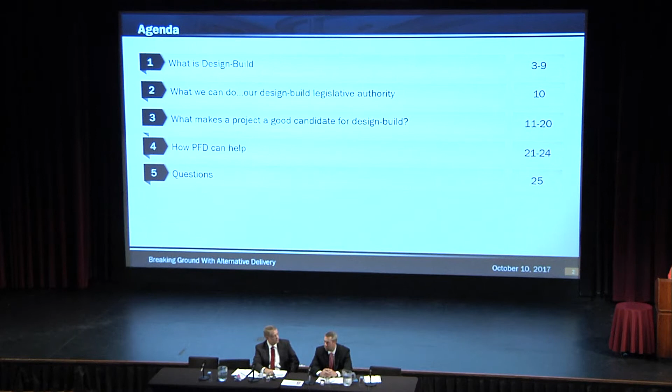Okay. Well, when the first polling slide comes up, I think there'll be instructions on how to enter your phone. You'll text a code to a number, and then at that point you'll get a response saying you're entered into the room. And when the questions come up, you'll enter the options on the screen. So I hope it works.

So getting started with what is design build. In its simplest form, design build is a contract where the design and the construction are both included in the project that's transferred over to the private developer. Contrast this to design bid build, where the owner or TxDOT will procure a full set of drawings. At that point, they take it out to the market for fixed-priced bids to build that scope. The risk for design errors or changes lies with the owner, and on design build, that's transferred over to the developer.

Additionally, it does have design included in the contract. It's still, though, primarily a construction contract. It can include some additional scopes, such as right-of-way acquisition, environmental permitting, utility relocations. Now, the level that this is included is a little bit up to the discretion of the district. If the district would like to purchase all the right-of-way prior to launching it, they certainly can do that. If they want to advance it up to a certain point and then during the procurement say, we're stopping here at 40%, the rest of the 60% will be up on you, developer, upon award of the contract. So there is some flexibility on how much is transferred over and how much is still done in-house.

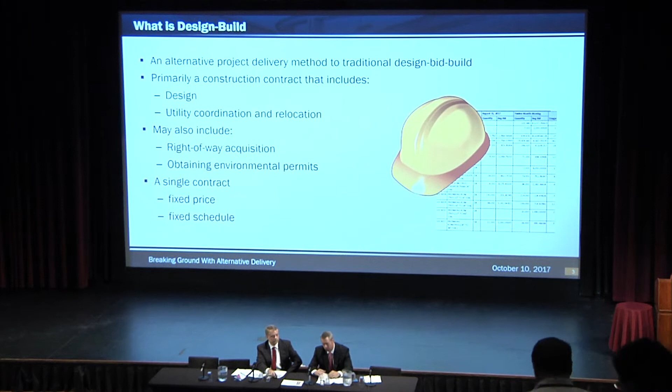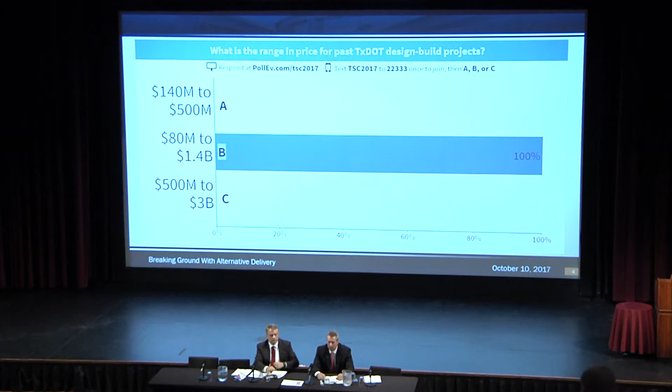So, on to the polling, right out of the gate. As you can see there, you'll need to text TSC 2017 to the number 22333. And then the question is, for those of you that may be familiar with the TxDOT Design Build program, what is the range in projects that TxDOT has done for past design build projects? Does it range from 140 to 500 million? 80 million to 1.4 billion, or 500 million to 3 billion? We'll give a few seconds for people to get their phones synced in. All right, I think we're good.

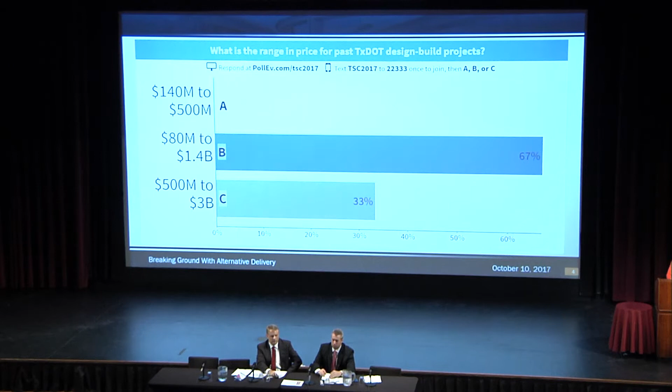And the answer is? So the audience thought it was B, for those that were able to get their votes turned in. And they're correct. The answer is B. The smallest design build project TxDOT has done is the US 77 down in Corpus, so it's 84 million. And the largest is the I-35E in North Dallas, which is almost totally finished. And that one's valued at 1.4 billion.

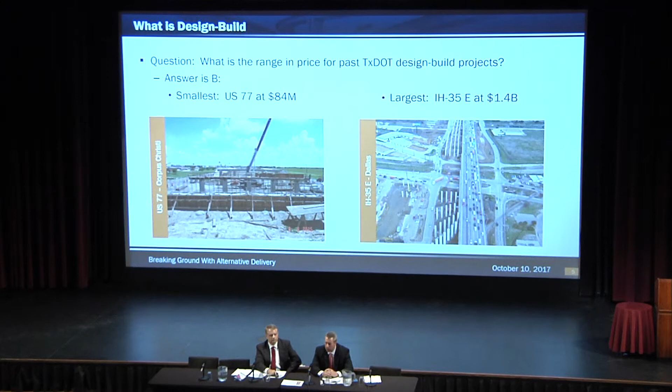I think everyone woke up from lunch. People have been paying attention. All right.

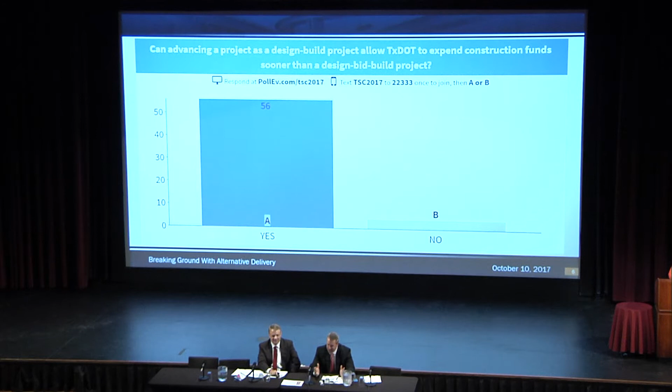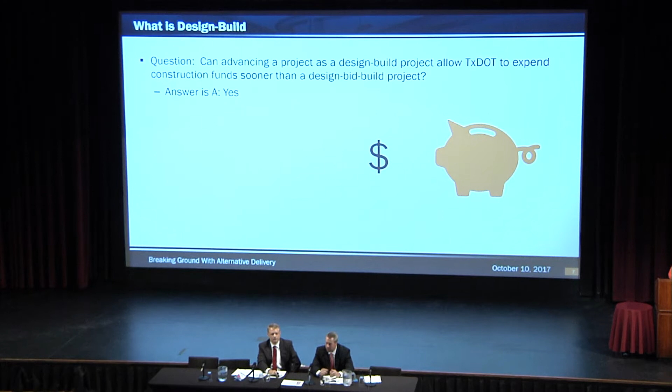Let's go ahead. Okay. So the audience thought it was A, and the audience is correct. Advancing a project as design build can allow the owner to spend money faster, and Mike is going to tell us how that's possible. Okay, so the answer was yes, you can expend construction dollars sooner. And so the next couple of slides are a visualization of how that could occur.

However, for a design build, if you keep your eye on the triangle representing contract execution, again, that can be accelerated to where you're expending those contract dollars sooner. And all that's really needed to reach contract execution is a 30% schematic and some procurement or contract documents in order to select a DB contractor. It's the DB contractor that will optimize all of the project milestones. Again, the utilities, the right-of-way, the design and the construction based on what makes sense for accelerating the project and keeping costs down.

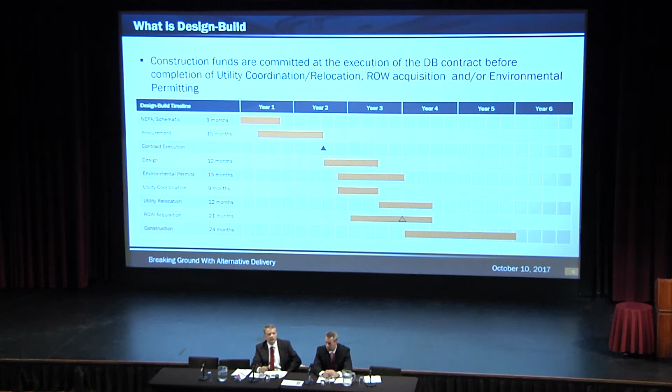An example of that would be, let's say there's a major utility that's a conflict. Well, on design bid build, you'd have to wait for all of the right-of-way and all the utilities to be adjusted before you could go out to let, and the design would have to work around that. However, for design build, the DB contractor can work that into their schedule, adjust that, and have the remaining efforts, design, utilities, detailed design, ongoing at the same time that the adjustment is going on. So certainly there's a lot of benefit to the design build delivery system in terms of time and costs.

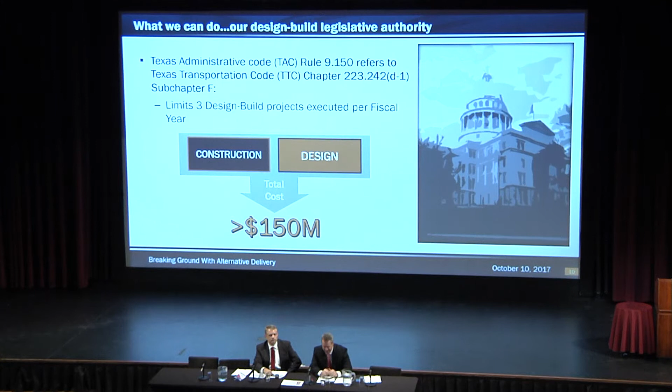All right. Moving on, what can we do? How can we use the design build legislative authority that's been given to us? This is going to be a little bit repetitive to what we just heard from Mr. Hale, but it's already in the slide, so you're going to hear it again. Chapter 223 of the Transportation Code is what originally authorized TxDOT to enter into design-build contracts with a single entity to provide both the design and construction of these roads.

This section in the Transportation Code limited us to 3 projects per year. Now, that's 3 projects that reach execution per fiscal year, not 3 that we start the procurement, not 3 that are ongoing in procurement, not 3 that have been awarded. It's the signed, executed contract docs. 3 of those per year is what we're limited to. Originally, when this was introduced, the minimum size we were allowed to use this on was $50 million projects. However, in 2015, House Bill 20 raised that number to $150 million. Both the design and the construction can be added in to get to that $150 million amount.

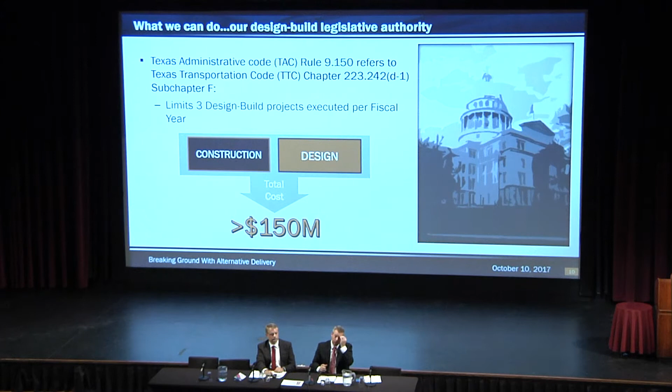So, moving on. So Matt, real quick, quick question. What goes into a design build cost? Well, that's great. I'll answer that in just 1 second. Okay. So, on the project categories that make a project a good design build candidate, some are black and white, like the $150 million. Some are various shades of gray, like we said earlier, the level of utility relocation, right-of-way, permitting. But as Mike was just asking, the $150 million includes both the design and construction efforts and the professional services that are used to build that project. That can be surveying, geotech investigation, right-of-way acquisition services, permitting, basically anything except for the actual purchase price of the land. That cannot be included in the $150 million. So, great question.

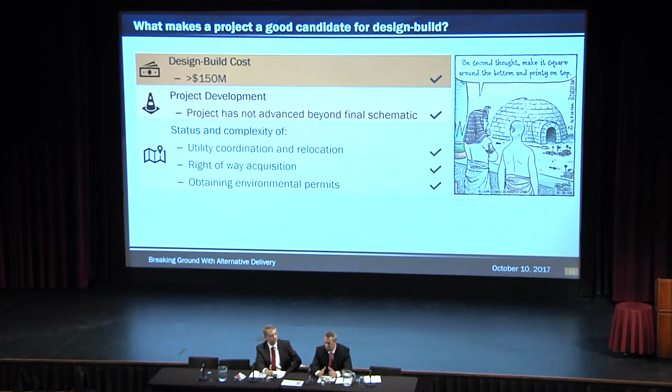Additionally, you want to identify a project as potentially a design build early on, so you're not more than 30% into your schematic design. If you've already purchased all the right-of-way, if there is little to no utility relocation, if you've already got the permits, and you've already got 100% schematic, you probably would want to develop that as design bid build. But if you can not spend all that money in-house or through consultants and identify it as a design build project, then you don't have to spend that money up front.

Additionally, complexity. We've got the word complexity on there, but basically the big takeaway right there is innovation. If it's just a two-lane road and we're adding a third lane, just adding pavement to the existing pavement, probably not a lot of room for innovation on that project. But if this is a project in a highly congested area with interchange reconstructions, direct connectors, or it's in an area with a lot of cut and fill, those kind of projects have got a lot of opportunity for innovation to occur when you get the designers and the constructors in the same room. How can we build it? How can we design it to optimize this? That's where you really realize a lot of those cost savings.

For example, the SH-183 Managed Lanes project in Dallas, which is currently under construction, the department is receiving about $1.2 billion in scope improvements for a price of $850 million. This was realized through optimizing the design and also through the competitive procurement process that always requires our developers to sharpen their pencil and give us the best price in order to win those projects.

The site conditions. If there's a chance for significant field changes, design changes due to unknown site conditions, then it might be advantageous for us to enter this project into the design build category to be able to shift that risk over to the developer that can adjust their team, their workforce appropriately to adhere to their schedule.

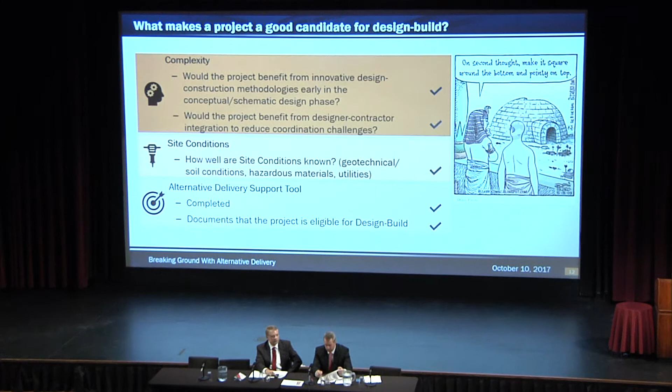We should probably remind the audience that this is the same tool that Mr. Hale was referencing in his opening remarks. Yes. Certainly want to use that to assist us.

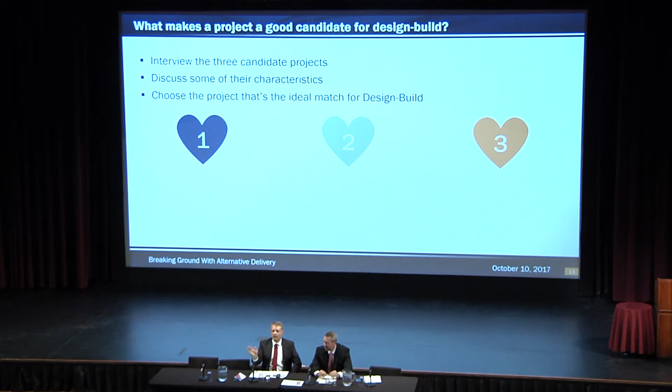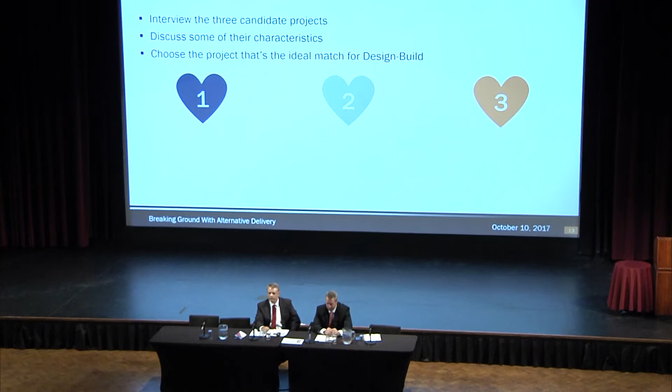All right, we referenced the lighthearted skit earlier with audience participation. So now that we know the characteristics that make a project design build eligible, it's time to play the alternative delivery dating game, where you, the audience, get to play project matchmaker. I'm your host. Please give a warm welcome to our eligible bachelor, Mr. Design Build. Thank you, Mike. Everyone calls me Mr. Design Build, but you can just call me Matt for this game. I'm hoping to find the project with all the right characteristics. I'm ready to find my other half. But I need you, audience, to keep your phones out. Well, Matt, you know the rules. We've identified 3 projects eagerly awaiting to find out if they're the match for you. We've interviewed them about their cost, design development status, complexity, and site conditions, and we'll reveal the details, then ask the audience to vote on which project or projects are a good match for Mr. Design Build. Ready to play? I am stoked. Let's do it.

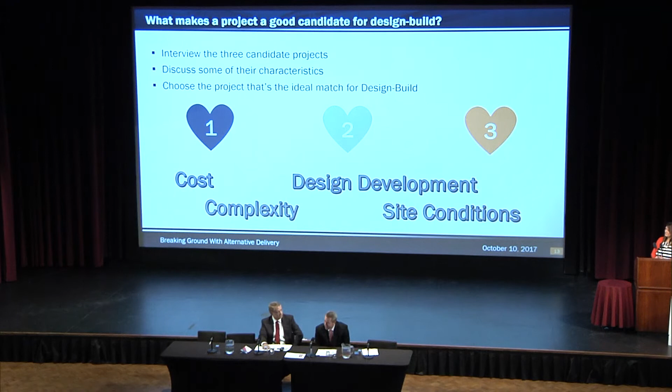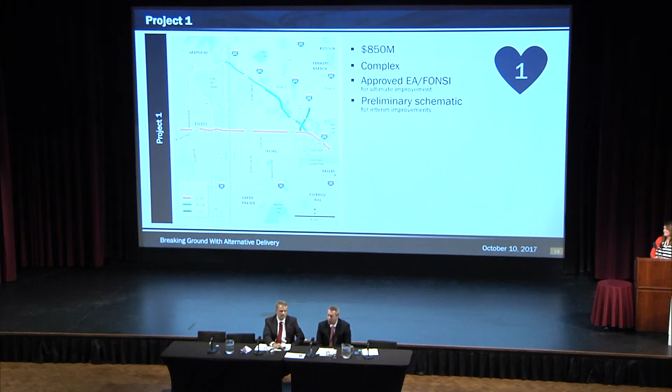Project number 1 hails from the great Metroplex. It has an $850 million estimated price tag, and it's very complex. I like expensive and complex. Tell me more. This project has an approved environmental process, and a preliminary schematic for both the ultimate and the interim, so it's a 2-step process. A phased delivery in an already congested corridor certainly sounds challenging. What else? It has significant utility relocation needs, and some of the right-of-way is acquired, but much is yet to be acquired. Sounds right up my alley. Let's talk about commitment. Has there been any completion commitment to the locals? Yes, there is a political commitment to open this to traffic before the end of 2019. Well, this project has some very attractive traits.

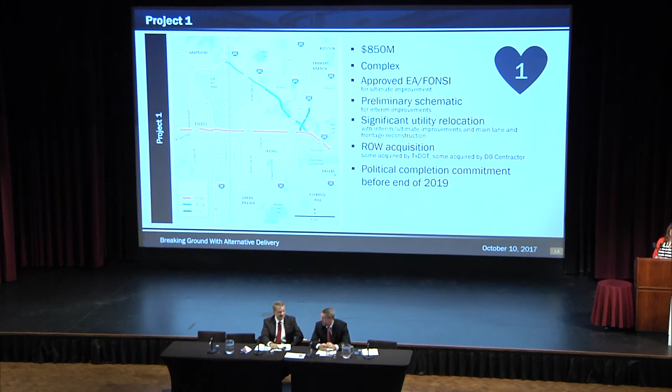I don't want to rush into a relationship too soon. I've done that in the past, so I want to hear about the other two contestants before I get ahead of myself. All right, well, then on to project number 2. So project number 2 has a lush lake view, and it's a $300 million estimated cost. It's not as complex, and it does hail from North Texas.

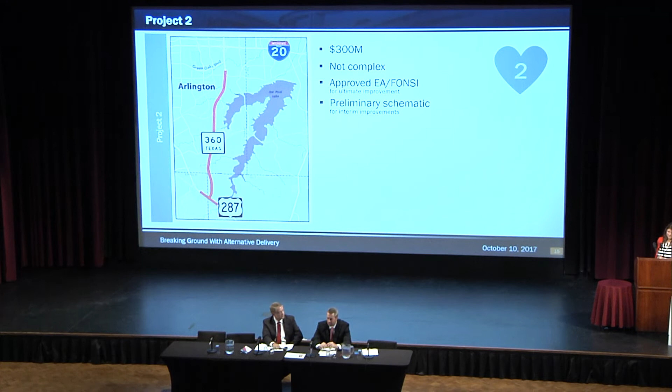It sounds slightly high maintenance, but I'd like to hear more. Well, in terms of maintenance, by the way, it is going to be completed and turned over to the local toll authority for maintenance, so funny you should mention that. In addition to the $300 million price tag, it also has an approved environmental process, and it also has a 2-step phased preliminary and ultimate schematic.

Interesting. Can you tell me anything about utilities or right-of-way? Again, there is significant utility relocation needs, and unfortunately, all the right-of-way is already acquired. Already acquired? I generally prefer my right-of-way unacquired. So I think I can live with that, but is there anything else you can tell me about Project 2? Well, I know how much you like commitments, so yes, this one has a political commitment as well. Well, I do like a project with deadlines that make me sweat a little bit. I hear you.

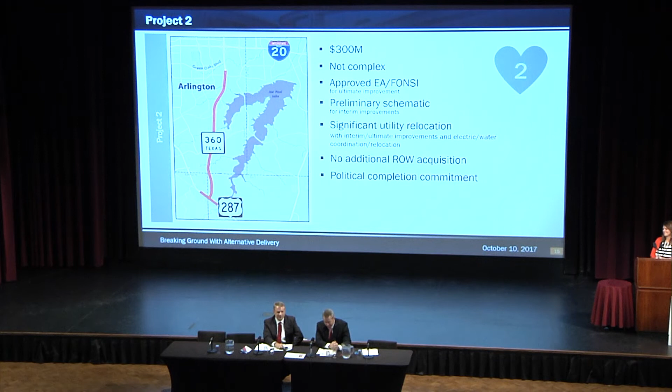Okay, what about number 3? Well, number 3 hails from our Gulf Coast. It has beachfront views and some of the best hunting and fishing in South Texas. It is an $84 million estimated cost. It is low complexity. It's just essentially upgrading from a U.S. to an interstate facility. Lots of roadway widenings, et cetera.

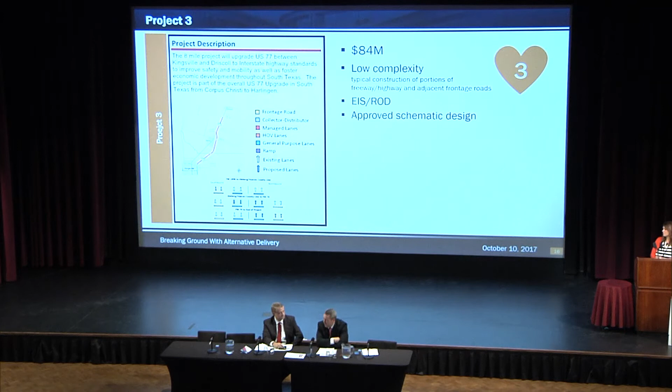Coastal, yeah. I'm kind of allergic to nature, Mike. I'm what you might call an indoor cat. But please continue. Okay. Well, this one does have a record of decision, so the environmental is completed as well as it has an approved schematic design. Yeah. EISs tend to make me hyperventilate. But, no, okay, I'm kidding. Okay, let's hear about the utilities and right-of-way, please.

Well, this is a pretty simple project from the standpoint there is no significant utility relocations, and again, other than an occasional corner clip, all the right-of-way is already acquired. Okay. So that just gets me back to one of my favorite questions, commitment, right? When I was a young Mr. Design Build, I tended to shy away from commitment, but I think I'm ready for it now. Well, I hate to break your heart, but this one does not have a commitment, so apologies for that, and there's no permitting.

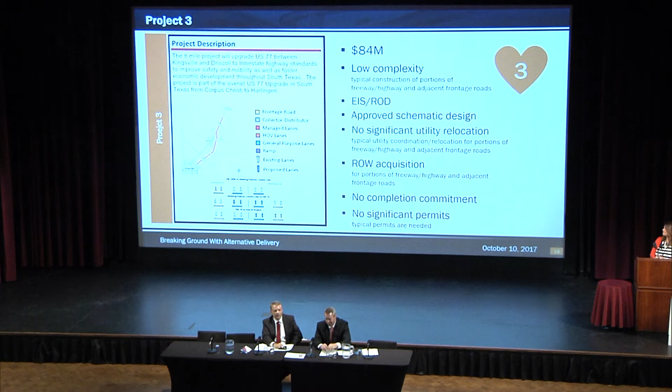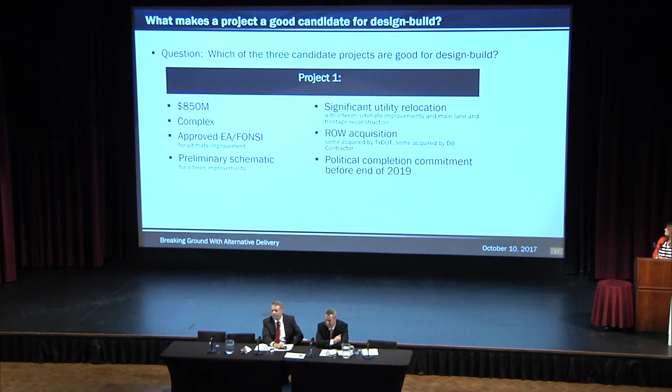Okay. Well, this is challenging. A lot of these projects all have some similarities, but also some notable differences. It's a difficult decision for me to make, but I think I've made my decision. Whoa, hang on. We need to poll the audience. Oh, yes, please. So everyone get their phone out, and we'll do one project at a time. Vote now for whether or not you think project number 1 is a good candidate for Design Build.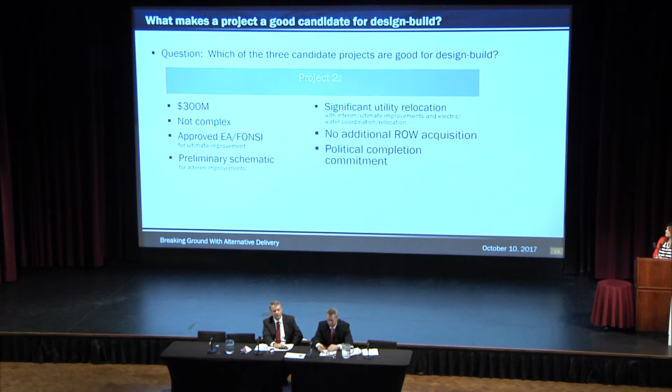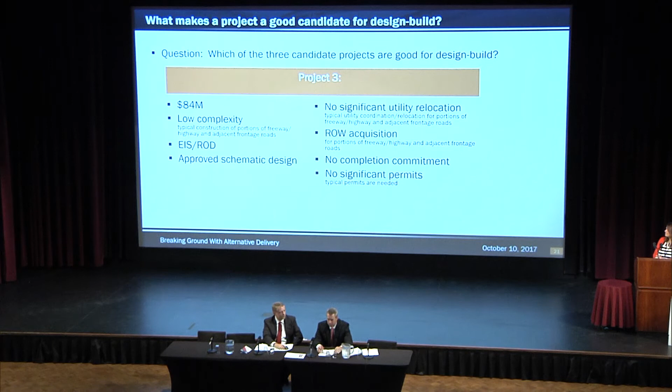All right. And project number 2, a quick reminder, the $300 million with the lake view. Please vote now. And last but not least, project number 3, hailing from the Gulf Coast, with some of the best hunting there is, I might add, King Ranch.

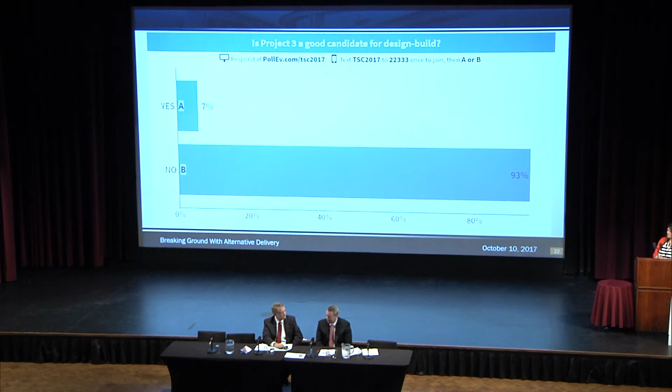So Matt, what do you think about the results? Well, the results are in. It's pretty overwhelming on all 3 of them, although number 2 seemed to have a little bit of a split decision, but it looked like the audience thinks that number 1 and number 2 are good candidates, and number 3 is not. Well, let's review what does make a good candidate for design build.

Project number 3, we slid a trick question in on you because, unfortunately, project number 3 had an $84 million estimated cost, which is below the $150 million legislative threshold. So sorry for throwing you a trick question, but we just wanted to make sure you're awake.

Projects 1 and 2, both strong design build results on the alternative delivery support tool that Mr. Hale is referring to. One was a little bit stronger with 0.46 because it was a little more complicated, a little more expensive, as well as on the top 100 congested roadways. Project 2 is also a strong design build candidate project, so you really have 2 to choose from.

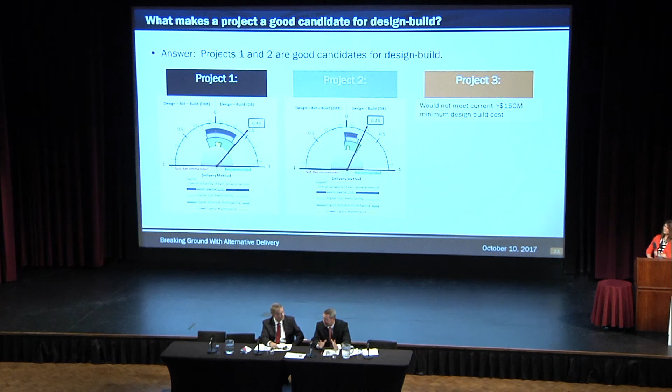Well, I, for one, am a happy camper. I came in here thinking I was just going to get one. Now I'm going to have one on each arm. Well, good for you.

All right, we'll continue on real quickly with another question. We're talking about TxDOT's experience with design build. How many design build projects do you think TxDOT has developed or advanced? So 5 to 10, 11 to 15, or 16 to 20?

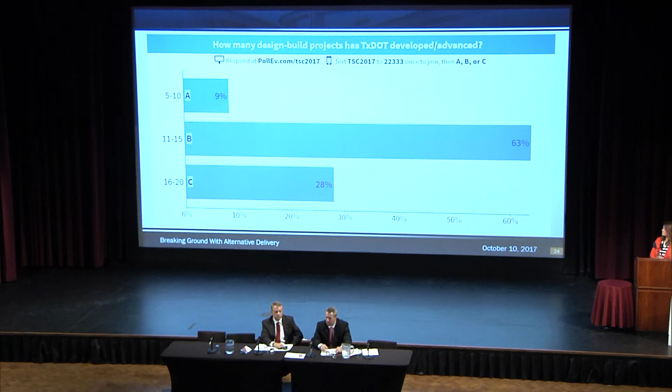All right. Some are still trickling in, but it looks like most of the audience thinks it's B. It's actually C. TxDOT has developed or advanced 16 design build projects. And on the next slide, we will kind of get into those. This is sort of an overview of the experience TxDOT has.

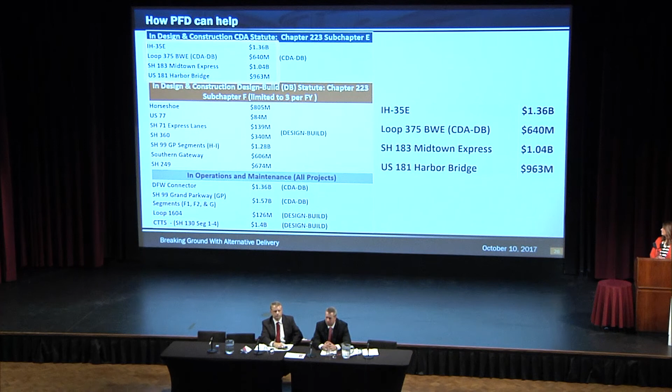The first 2 boxes, the dark blue on top and the brown in the middle, those are the ones that are currently in design and construction. The only difference between the 2 is the top box were developed under the CDA Design Build Authority, and the only difference between that and regular Design Build Authority is that it allows the opportunity for developer financing. The ones in the brown can still have financing, but it might be in the form of debt or loans, federal loans.

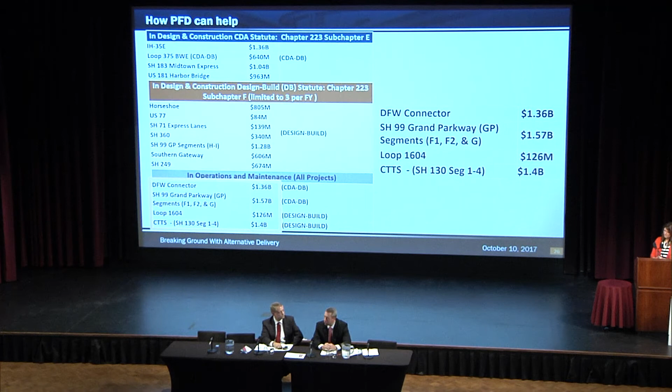And then finally, the box on the bottom is the ones that have been built and are currently in operation and maintenance. So as our program is getting more mature, we'll have more and more projects entering into the operations and maintenance phase.

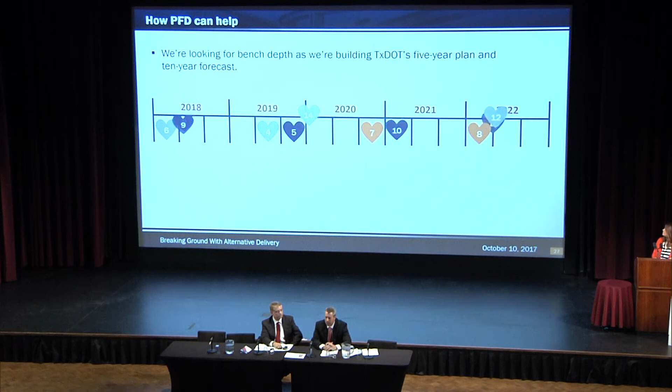Now, in summary, this is also going to be a little bit repetitious of what Mr. Hale said, but we've got 3 slots in the future for each year for design build projects. We're eagerly trying to fill all those slots. Today we've tried to show you some of the characteristics that make a good design build project, and we're happy to help support any of the districts identify projects or evaluate them through our alternative delivery support tool and just try and get more projects built.

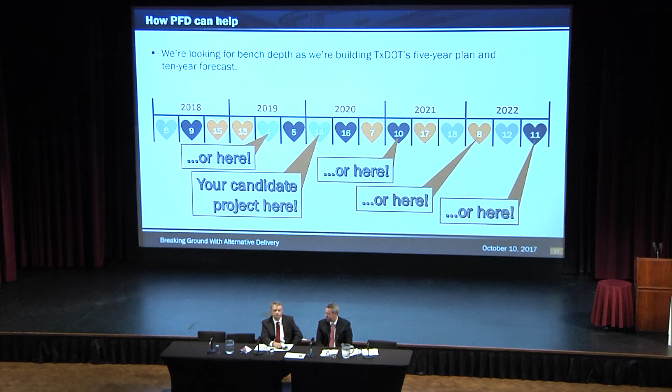So with that, are there any questions? Yes, sir? Are we doing any design build projects that aren't tolled? The question is, are we doing any design build projects that are not tolled? And the answer is absolutely yes. If you stick around, there's another presentation that may address that. But design build does not always equal tolling. That's only one component to be added if you want to add the tolling element. They're not married together.

Any other questions? So the question was, what goes into the decision on whether it's tolled or not? That is, well, Mr. Hale is the one who can answer. I would never, ever presume to speak for Mr. Hale in administration, so I welcome your response.

I guess the decision was, first of all, the local people, the ones that had it. Secondly, if it's primarily a management project, for traffic. So a lot of things went into it. It's a political issue as far as how you do it. But for the most part, if the locals wish to do that and it brings the project sooner rather than later, it allows for that to happen and helps put it together. Usually it's in a metropolitan area, downtown area, and the locals have worked so hard to get the thing ready, they wish to have some sort of element in there.